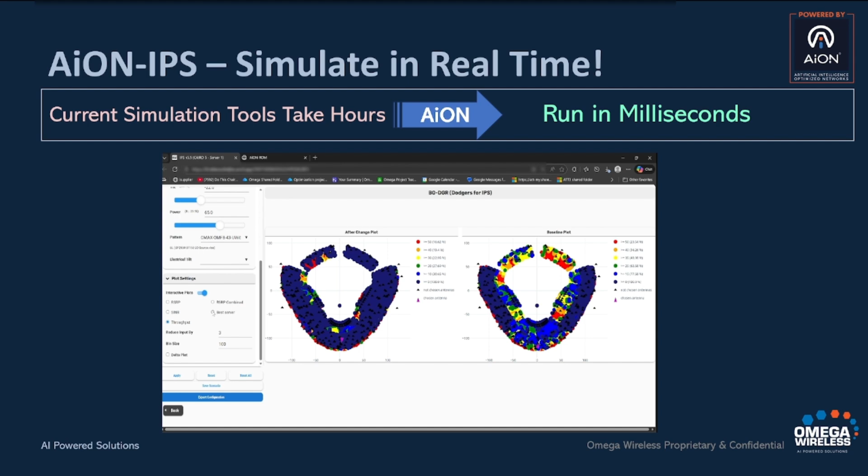What we've added in our tool also is the capability to be able to do a delta plot. If I change this antenna or tilt or power, what's going to happen to my coverage? What's going to happen to my throughput? What's going to happen to my SINR? And you can always play with your best server, play with your settings and antenna configuration and so on.

We also added another feature to be able to have a probe that displays all the details of where you're going, what antenna you're touching, and so on.

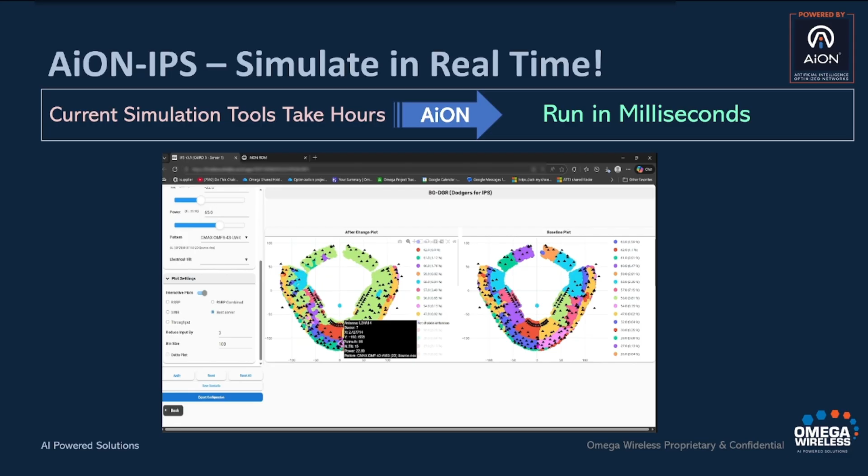All right, so this was what we shared last year. This year, we're adding a few more modules. The first one is kind of interesting. A lot of times, especially for enterprise, you get JPEGs or pictures or PDFs of CADs. You don't always get CADs. And that's a big challenge because it could take 10, 15, 20 hours. In a conventional way, you put the picture and start tracing the walls, building the doors and windows and so on until you get to a 3D model.

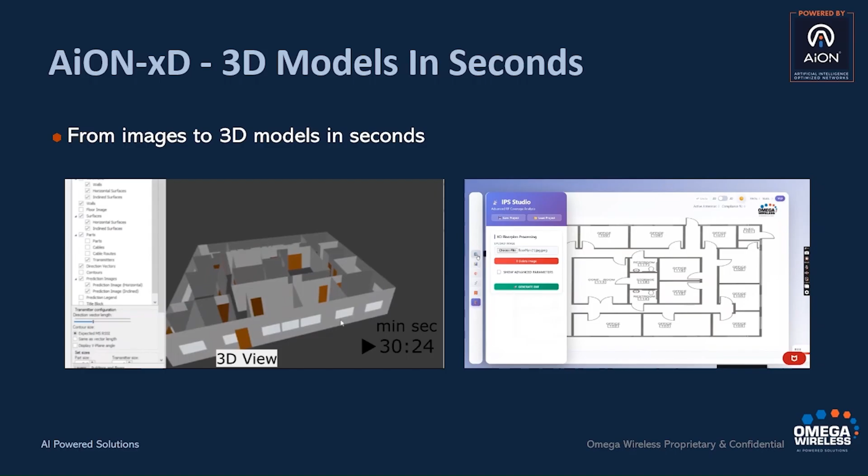So we utilized AI to actually do the same thing. We're going to open the picture and convert it in 1, 2, 3 seconds. And it comes up with a DXF file. That DXF file recognizes walls, doors, and windows in a few seconds. Now that DXF file you can take into any design tool or any CAD tool, and play with it. I want to say it's probably 90 to 95% accurate. As you can see, we recognize all of it.

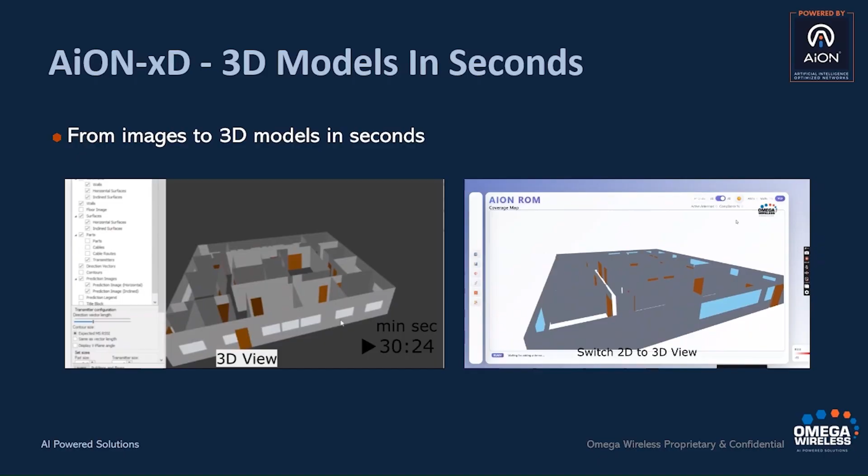So what used to take us hours and days maybe to build a 3D model, this will be a matter of seconds or minutes and you're done. So that's the first breakthrough this year.

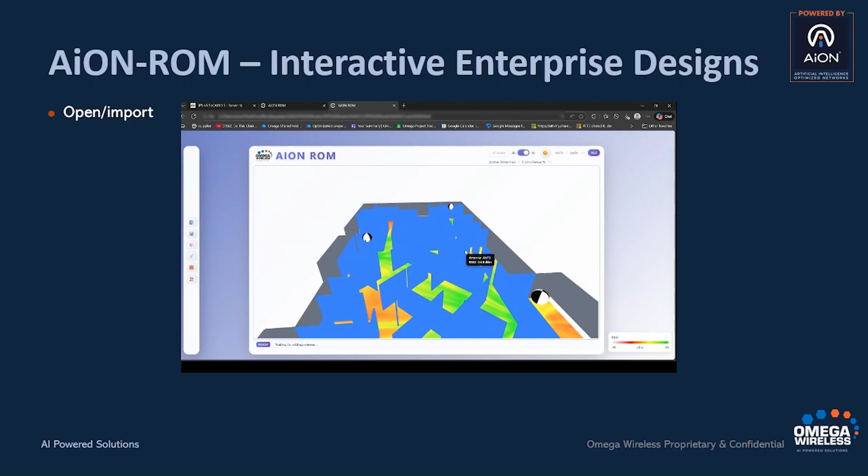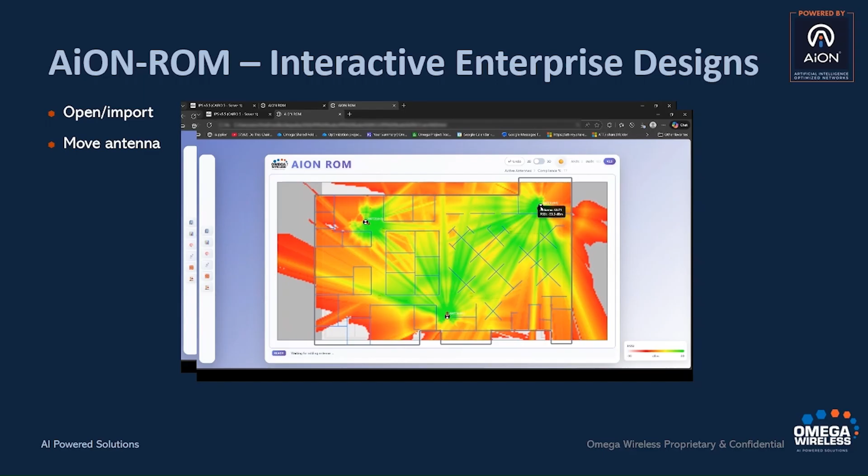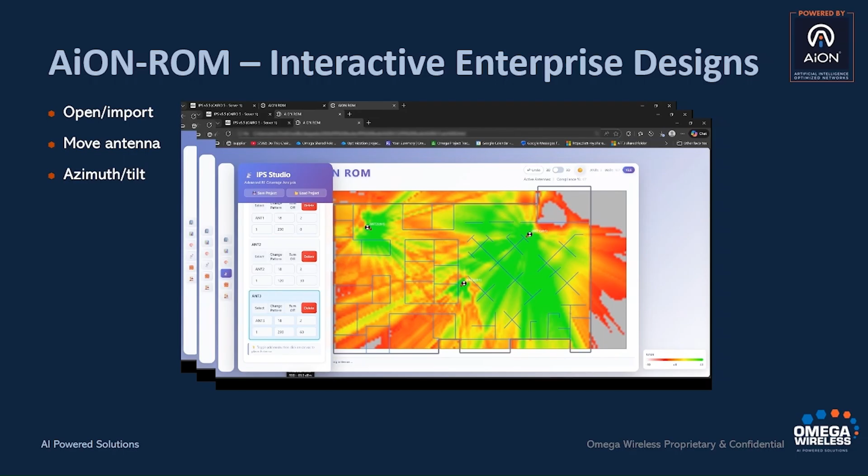On the next slide, we're talking about how we can use AiON to do ROM designs. So basically, you can build a project, import the project, you can start putting antennas, put the walls, start running prediction. You can move the antennas around, get an instant response or instant calculation that shows you where you are. You can change the tilt or azimuth, obviously. You can add more antennas. Run the prediction.

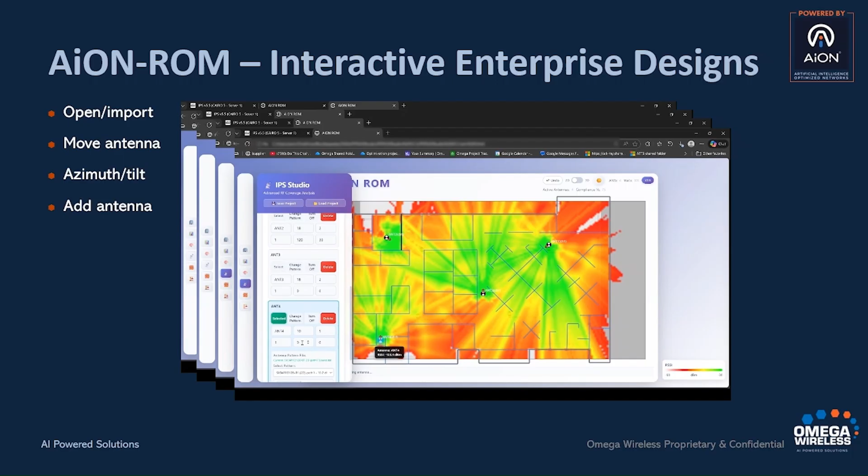You can even calculate your RSSI, RSRP, SNR, SINR, throughput, which is very important, as well as CCI. And you can optimize those. You can change the channels and get better results on the throughput. So this is if you want to do the interactive, I want to say, enterprise designs.

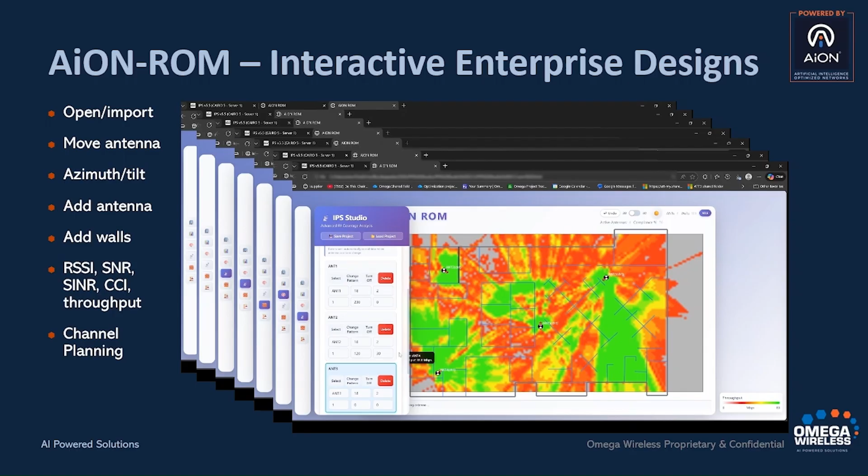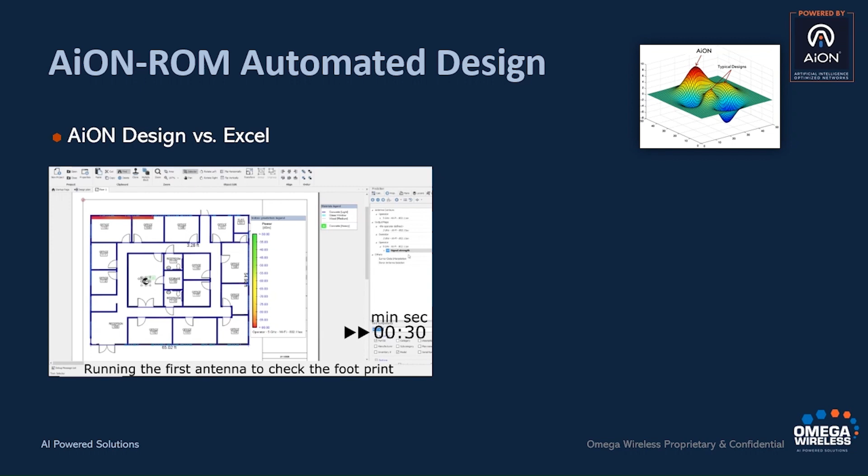Now, we said, well, this is great, but how can we use AI to automate even that? So with the AiON ROM Automate, we're actually able to build a design. If you want to do this in a design tool, you will be placing antennas, turning them off, turning them on, moving them around, so that you can achieve the minimum number of antennas that satisfies the threshold of coverage.

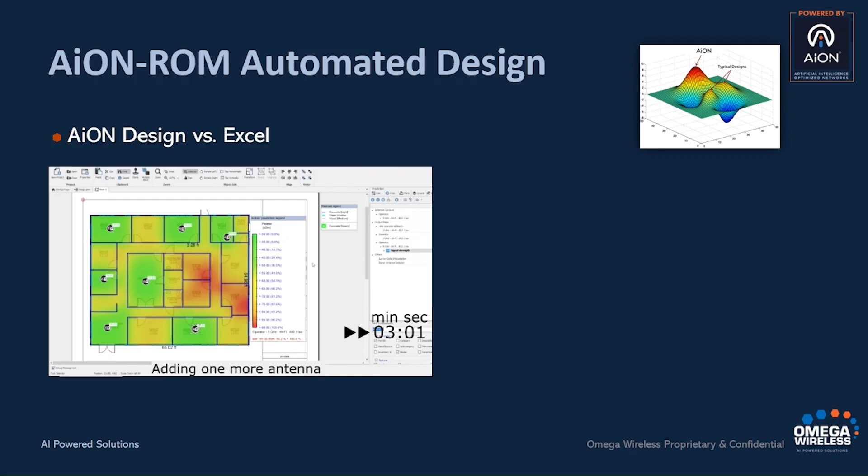On our side, we're able to load the 3D model, place all the antennas, and let AiON itself try to move the antennas around. You're going to see a little bit of action here, changing the antenna locations, turning on and turning off. Instead of having 12 or 15 or 20 antennas, you'll end up with probably like 8 or 10 antennas. So what is that minimum number of antennas that I need to cover above, let's say, minus 85, whatever that threshold is?

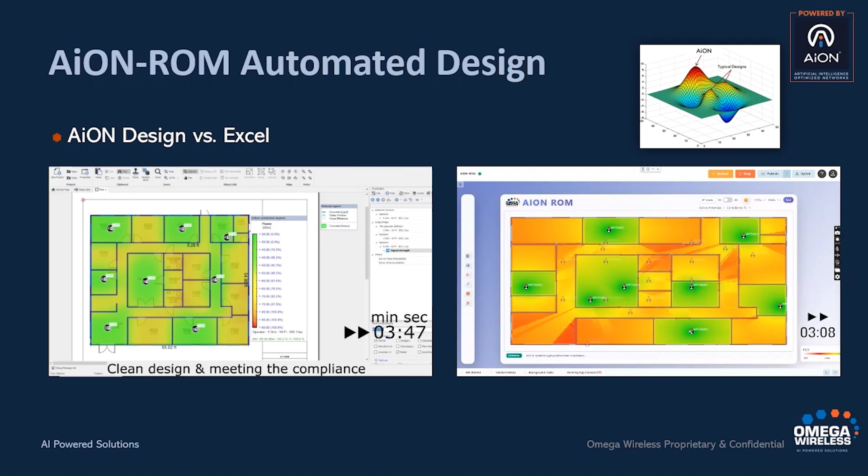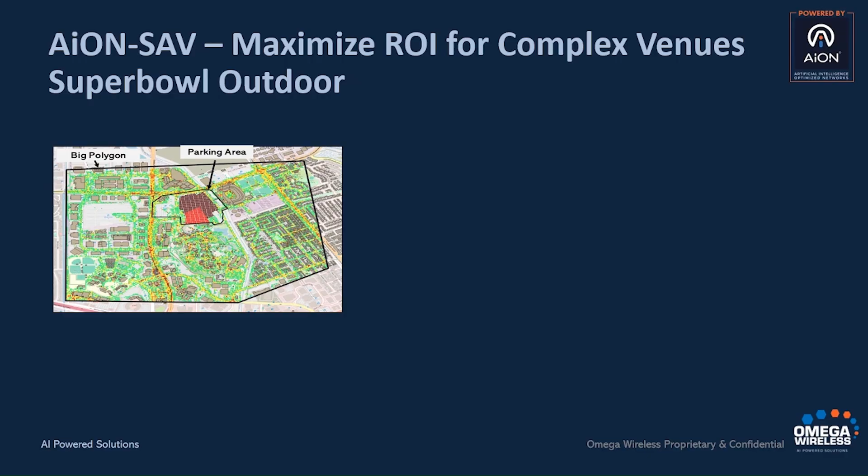This is an exercise that we did with AiON-SAV. This new module, with this new feature, allowed us to work with one of our partners in the room today. We worked with them for several major markets. For the Super Bowl event, especially for the outdoor area, we were able to reduce CapEx by almost 33%, while at the same time improve the throughput by 11%.

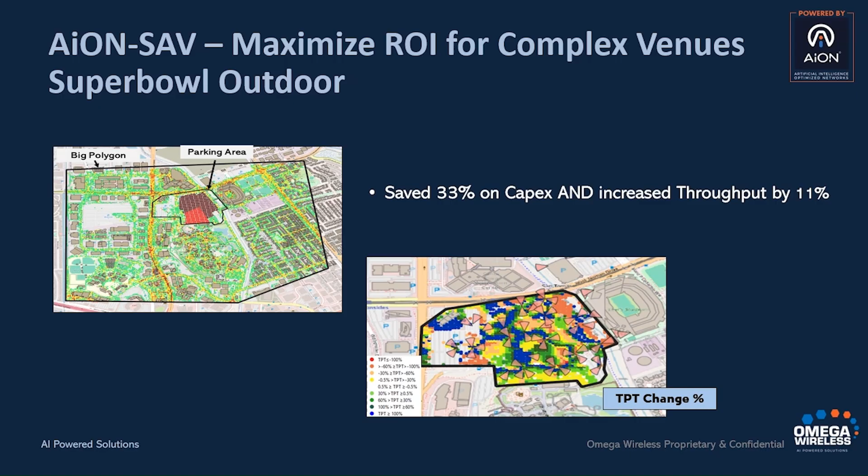So who said that you need that many sectors? Who said that what you have is too much or too little? What is the right value? How can we, instead of adding more sectors and more equipment, just optimize what you have and get better results out of that? A very similar exercise we did for one of our partners, one of our 3POs.

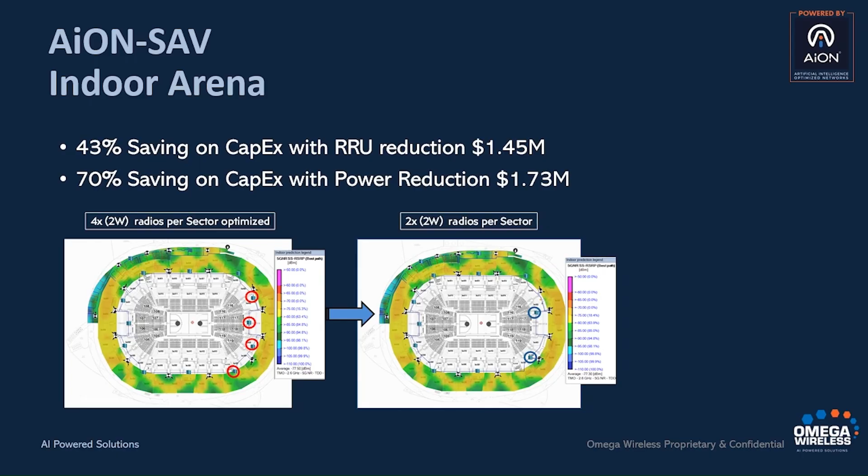They're here with us today, and we were able to actually reduce the number of radios within that little arena. We were able to bring the total cost of the system from $2 to $3 million to under $1 million. This was triggered by the fact that when AiON optimized, it said, well, you have a lot of these antennas, or all these sectors are overshooting or has a lot of power. What can we do to reduce this power?

If I reduce power, I can probably combine radios. I don't need that many radios. So you can combine 2 into 1. You can combine 4 into 1 sometimes without reducing your coverage. And with that, we were able to bring the cost down significantly.

Now, what that means to 3POs and even the carriers is you'll be able to build more venues. You'll be able to sign up more carriers on your venue. You make it more affordable to your customers, and you make it more reachable.

So to recap, with our new suite of tools with AiON, we're able to touch the system build process every step of the way. From the inception, from the ingestion of the 3D models or pictures or CADs into getting an initial ROM design or automated ROM design, trying to save on the design, giving you just enough sectors, just enough equipment, just enough configuration to serve the throughput that you want to deliver for your customers, whether it's a FIFA or LA28. We're involved in all of these.